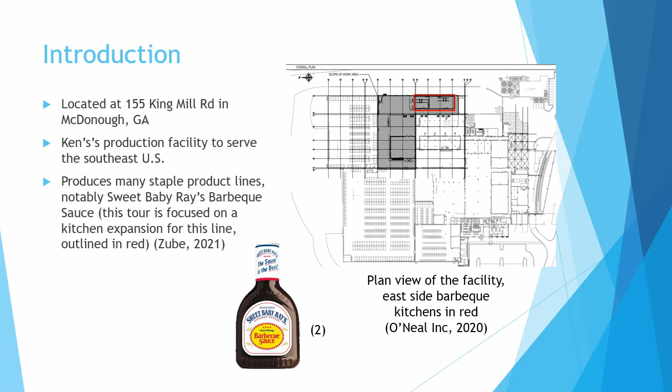Located at 155 King Mill Road in McDonough, Georgia, this location for Ken's Foods serves the southeast United States with staple Ken's sauce lines such as Newman's Own, Ken's Ranch Dressing, Honey Mustard, and Blue Cheese, as well as Sweet Baby Ray's barbecue sauce. The kitchens covered in this tour, outlined in red, are specifically used for cooking Sweet Baby Ray's.

This kitchen area on the east side of the complex was originally built in 1999 for use as a warehouse space, though recent expansions in Ken's business persuaded them to convert this space to production. Further works were completed to turn this area into a barbecue sauce kitchen in 2005.

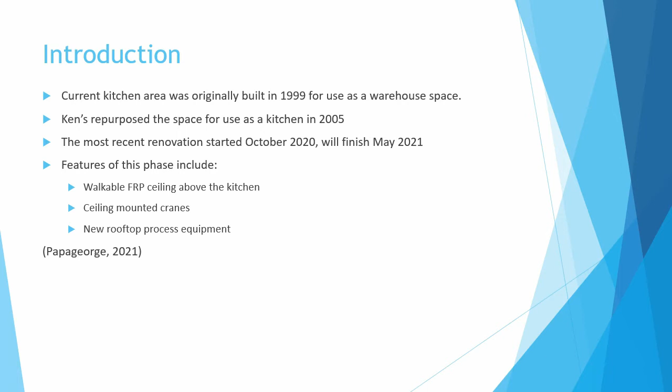Beginning in October of 2020, work began to increase structural performance to further add a walkable ceiling to the structure, additional process chillers on the rooftop, as well as a ceiling-mounted crane for adding ingredients to batch processes. This phase of the project is set to finish mid-May of this year, 2021.

Shown in the picture to the top left here, placements for cranes inside of these kitchens can be seen in the drawing. To the right, there's a picture taken from the walkable ceiling, which has recently been installed. And to the bottom left, there's a picture of the rooftop processing units, which are now placed on the structure.

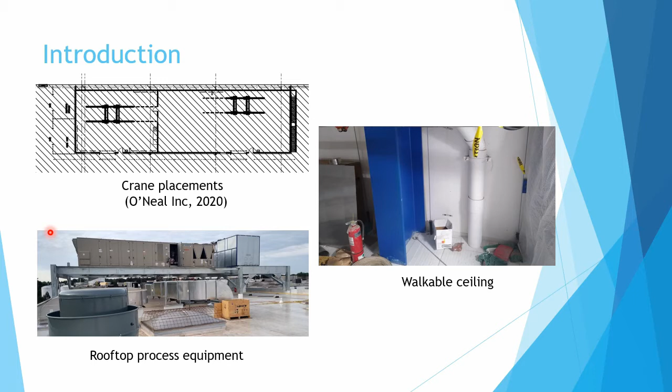For some brief information on parties involved in designing this structural renovation, the head architect is David Rager of O'Neal, and the head structural engineer is Gurmai Megasteb, PE of O'Neal.

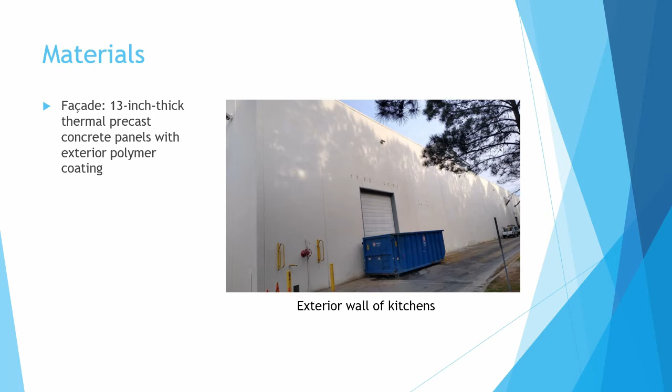For information on materials involved in creation of this structure, the external facade of the building is made of 13-inch thick thermal precast concrete panels involving 5 inches thick of concrete sandwiched between two 4-inch thick layers of insulation on either side, coated on the outside with a polymer coating to protect from weathering.

The floor of the kitchen area was originally polished concrete in 1999, but since the 2005 renovation has been switched to acid wash brick due to greater resistance to cracking and to eliminate maintenance needed. Interior wall panels in the kitchen are made of FRP, or fiber reinforced polymer, to replace previous concrete block in order to prevent excessive sealing needed during installation.

The kitchens also include a walkable FRP ceiling to access process piping and sprinkler equipment above the production floor. The roof of this structure is made of corrugated steel, topped with insulation and more thermal precast, finally topped with rubber mats for safe travel to rooftop process equipment and air handling units.

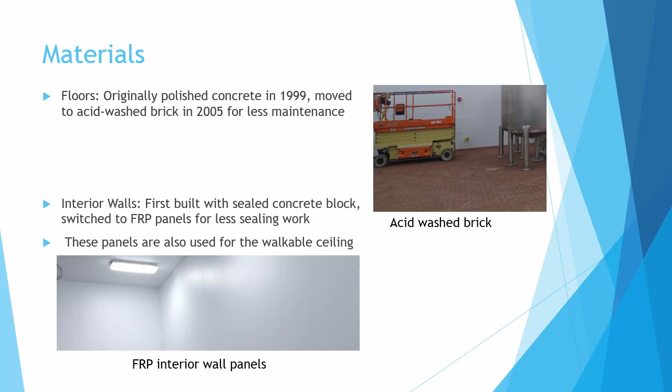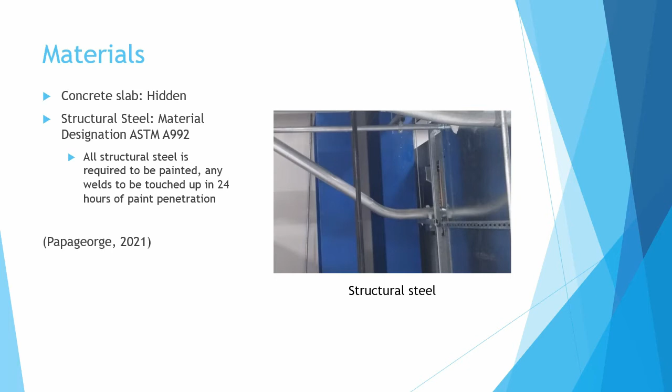The main load-bearing elements of this structure are made of structural steel, specifically ASTM A992. Structural steel was required to be painted and remain painted after welding due to the corrosive nature of the production environments within the building. For construction details, this phase of the project, once complete, will have taken 7 months.

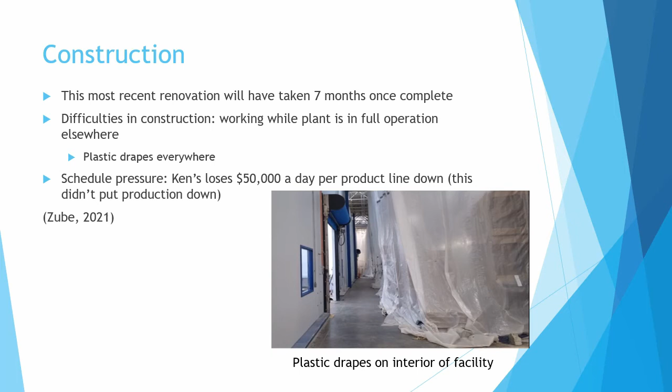Placement of structural steel for this project and mechanical equipment was done by method of a mobile crane parked on the back access road behind the plant. Though O'Neal was responsible for architectural and structural design work on this project, Capital Project Delivery was responsible for general contracting work, with major subs involved, including Action for electrical and mechanical work, along with structural steel performed by BC Steel.

For information on load paths, the structure is designed to take heavy gravitational load from mechanical equipment sitting on the rooftop, as well as the soon-to-be mounted ceiling cranes. As the sides of the building have very large flat walls, it is assumed there's significant wind loads that could also hit the structure, incurring design for rigidity.

Movements of fluid and process pipes can also incur a live load on the structure, as with the soon-to-be mounted ceiling cranes. While snow load was accounted for during design of this structure, it was not as significant as at Ken's other plants, say Massachusetts or Illinois.

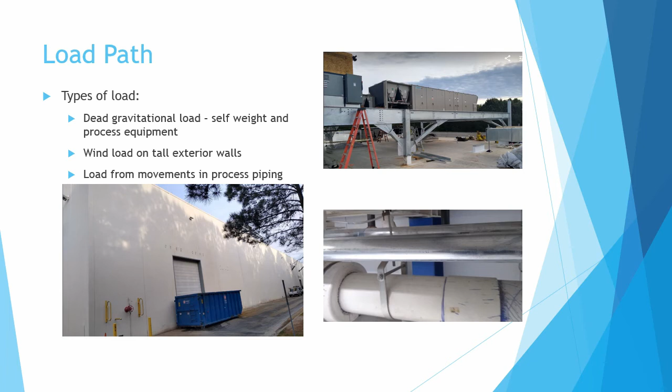Areas of the load path of this structure which are uncertain include sections of the FRP panels and the walkable ceiling, where it's difficult to see how much the mechanical equipment sits on the walkable ceiling, or how much of it actually ties into hangers that come off of the upper ceiling.

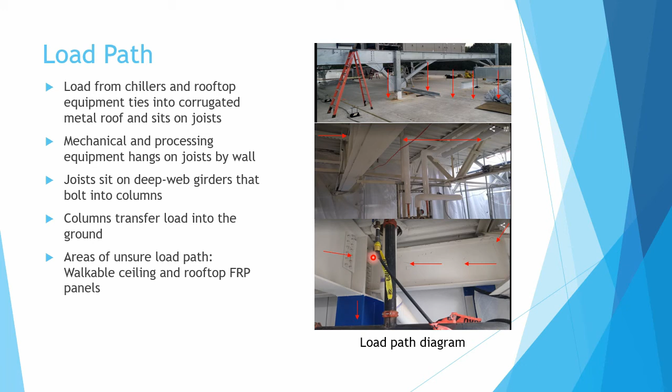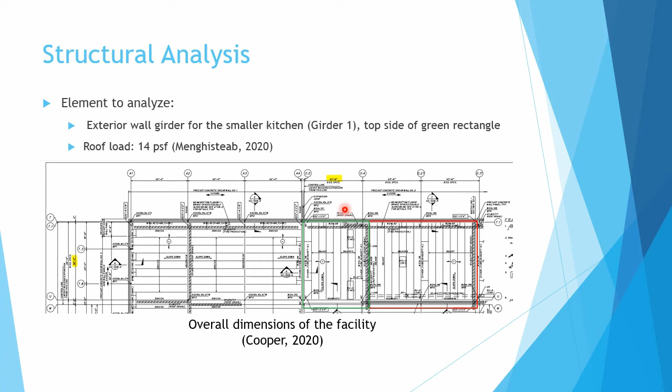For a simplified structural analysis of an element in the load path of this structure, the exterior wall girder for the first barbecue sauce kitchen, here outlined in green, will be examined. A rooftop load of 14 pounds per square foot will be assumed as per design documents. With dimensions of this kitchen taken from previous design documents as 56 feet by 43.5 feet, total distributed load on this section of roof comes out to 36,540 pounds.

As half this load is distributed to each girder, and then divided by its length for distributed load, also involving a 68 pound per foot self weight on girder 1, weight on this girder per linear foot comes out to 488 pounds.

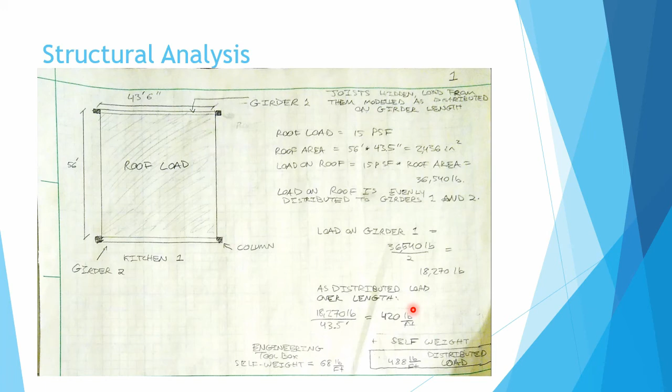With this new distributed load mapped onto girder 1 with a fixed condition at either of its column connections, a fixed end moment table yields a vertical support reaction of WL/2 at either end of the girder with a moment reaction of WL²/12. Plugging these values into actual dimensions of the girder yields a vertical reaction of 10,614 pounds at either support and a moment reaction of 76,951.5 pound-feet.

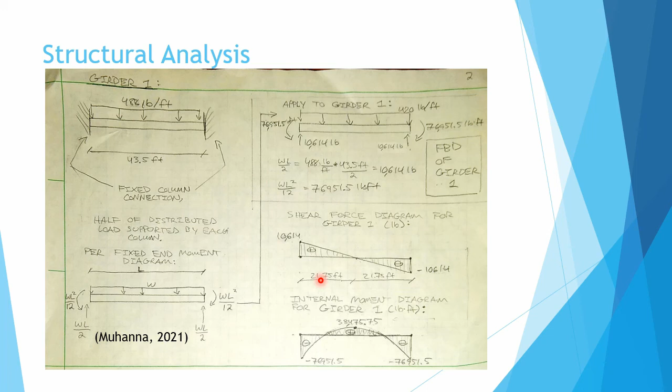In the bottom right-hand corner of the screen here, a shear force diagram and moment diagram can be found. Values off these diagrams will be used in the following slides to calculate internal stresses in the beam and compare it to material properties of the steel used.

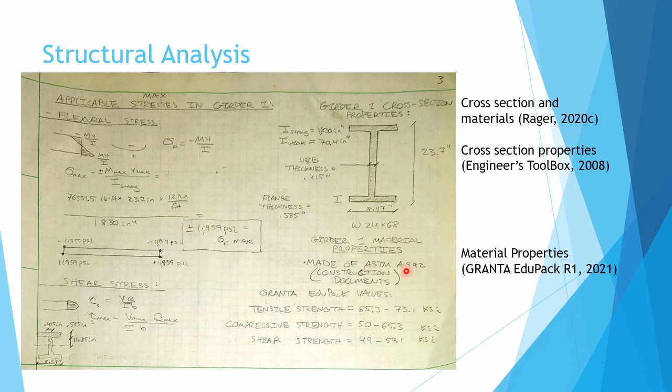In the top left-hand corner of the screen, max flexural stress calculations of the girder are found to be plus or minus 11,959 psi. On the right-hand side of the screen, cross-sectional and material properties for the element can be found, with a W24x68 cross-section and material composition of ASTM A992 steel. Shear stress calculations in the top half of the page here show a max shear stress of approximately 60 psi plus or minus.

When comparing these stress values to material properties of the ASTM A992 steel, it is found that flexural stresses come out to somewhere between a fifth and a seventh of compressive and tensile strengths, while shear stresses are several orders of magnitude smaller than the shear strength of the material. Therefore, it is found that flexural stresses were likely designed for over shear stresses for this girder.

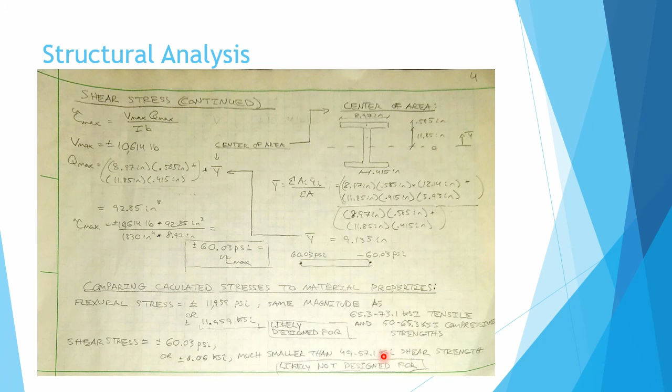In conclusion of this tour of the barbecue sauce kitchen renovations on the east side of Ken's Foods' McDonough, Georgia production facility, it is concluded that structural renovations in this project have allowed for installation of ceiling cranes and additional rooftop equipment to improve production efficiency. It is also found that installation of walkable ceilings allows for easy access of mechanical equipment vital to production processes.